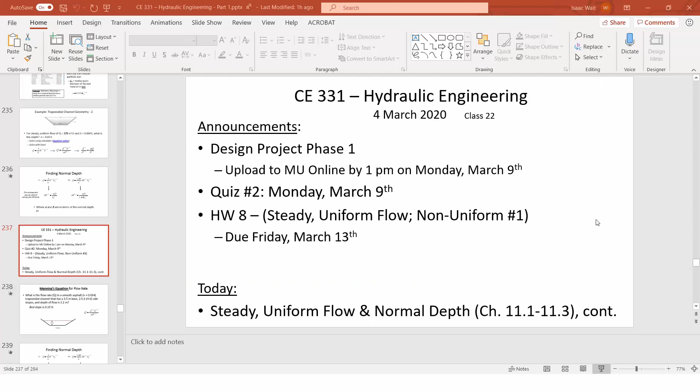Okay, so here on the whiteboard, I've given you kind of a hint of what we're doing for the area. The area has two components. It has the rectangular component of the channel, so the 1.2 meters by 3.5 meters is this rectangular section. And then, since we know it's 2.5 to 1 on the side slopes, that means that if it's 1.2 meters of height, then this distance over on the side is going to be 3 meters, because it's 2.5 times 1.2. So if the depth is 1.2, then this width of the triangle will be 3 meters.

And so if you put these two triangles together, then it's essentially a rectangle that's 1.2 meters by 3. And so there's the middle part and then the two sides together for the area. And then the wetted perimeter is going to be the bottom width of 3.5 meters and then 2 times the side length. And the side length here, the hypotenuse of that triangle, is going to be the square root of 1.2 squared plus 3 squared.

So if we find the square root of that, what we should get for the area is 7.8 meters. And for the wetted perimeter, the distance should be 9.9622 meters. Okay, so once you have those geometric parameters, then you can substitute it into Manning's equation to find what flow rate should we expect for this depth, slope, roughness value, and geometry.

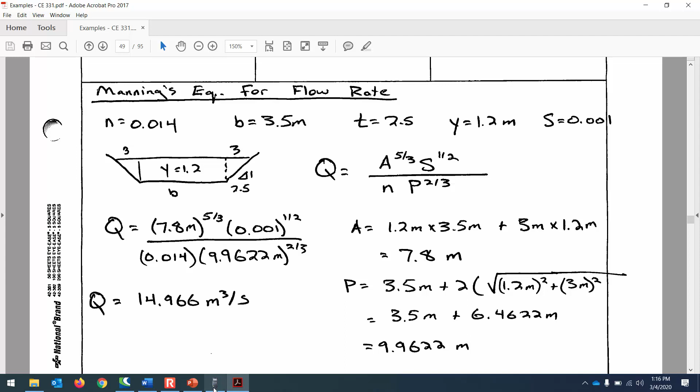So normally as a hydraulic designer, really what you have control over is the material, so that affects the n value, and then you also have control over the geometric shape and the width of the channel. Flow rate is something that's usually given or a result of things like storm conditions. So any questions on this example that we're using to calculate the flow rate from an observed depth?

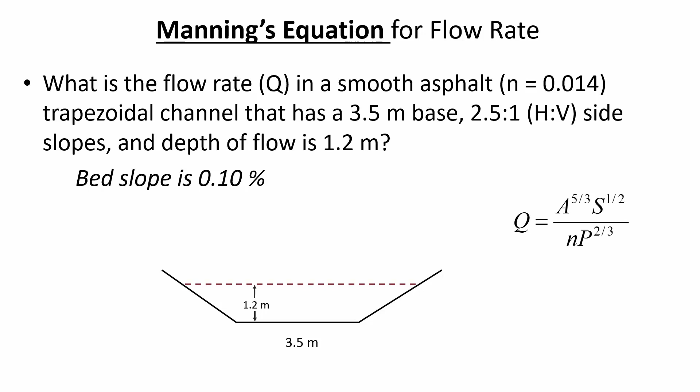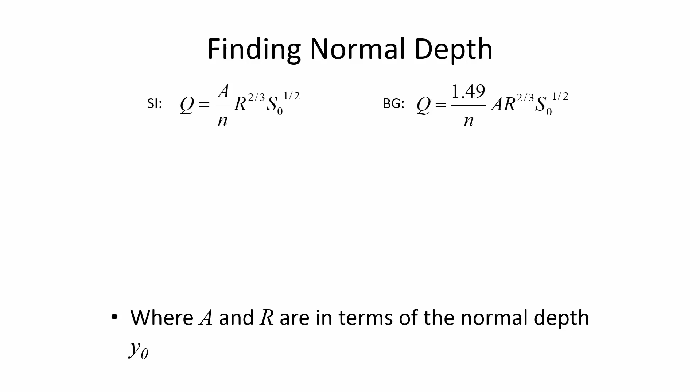Okay. So the trickier thing by far is to calculate what depth will you have for a certain flow rate. What we've just done is relatively direct and straightforward, but the tricky thing is rearranging this. If we're going to solve it with the solver, then you don't have to rearrange the equation algebraically. You just type everything in terms of y.

But if we're using Excel, like was demonstrated in class previously, the technique there was to move all of the constants to the right-hand side of the equation and then start with a guess value of the depth and see what depth it takes until the left-hand side and the right-hand side are equal and there's no difference between the two.

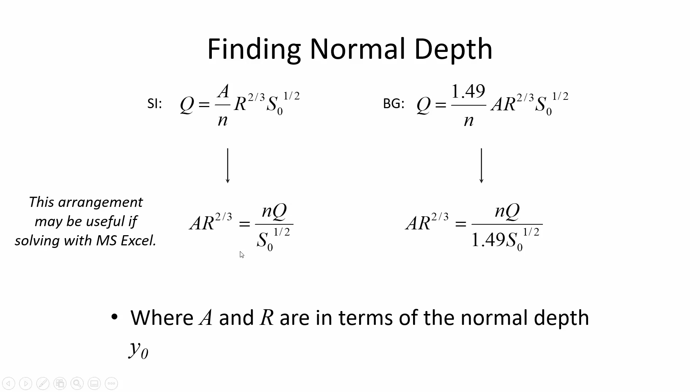But I told you that it's unavoidable that you have to learn how to do it on the solver of your calculator. I'm going to show you with this next example what it would look like if you solved it on the calculator that I wish you owned.

I wish you owned the HP 50G, and in fact I was considering making it a requirement for the freshmen who enter Marshall next year, but what I just learned the other day is this calculator's been discontinued. Yeah, so that'd be a fun requirement. Yeah, they'd have to buy it from, I don't know, like an overstock place.

I mean, HP still does make a calculator that's awfully good, but I don't have one, and I don't know. The new HP calculator is called the HP Prime, and I think it's targeted more towards the education market, where the HP 50G was directed at engineers specifically. It was less about the education market and more about engineers.

So, all right, let's take this trapezoidal channel, and we're going to put 29 cubic meters per second through it. We know the bottom width is 3.5 meters. The side slopes are 2.5 to 1. So this is a bed slope of 0.001. This is the same layout as the example that we just worked.

In the example we just worked, though, what we had was a depth of 1.2 because we had a flow rate of, what was it, about 15 cubic meters per second in that example. So what if we take the same channel and instead of a flow of 15 cubic meters per second, what if we put 29 through there? The question is, what is the depth?

So let's solve the same problem where we've got 29 cubic meters per second going through this channel. Here's the equation you need to put into your Casio, and you're going to be solving for the depth Y. All right, so here is the equation translated into Casio speak, and what we're going to be solving for is the depth. Same channel geometry. Let me write the factors on the whiteboard since they won't be on the screen with this up.

So we've got N is equal to 0.014. The slope is 0.001. The Q value that we're sending through that channel is 29 cubic meters per second. The T, the side slope, is 2.5 units of horizontal per vertical. And the bottom width, B, is 3.5 meters. And we want to find out what is the flow depth under steady uniform flow. So what's the normal depth using Manning's equation?

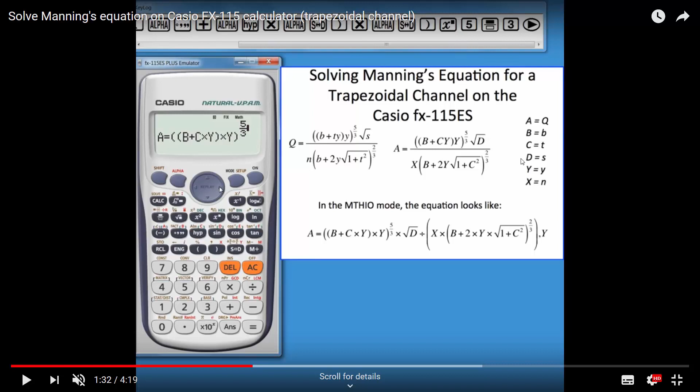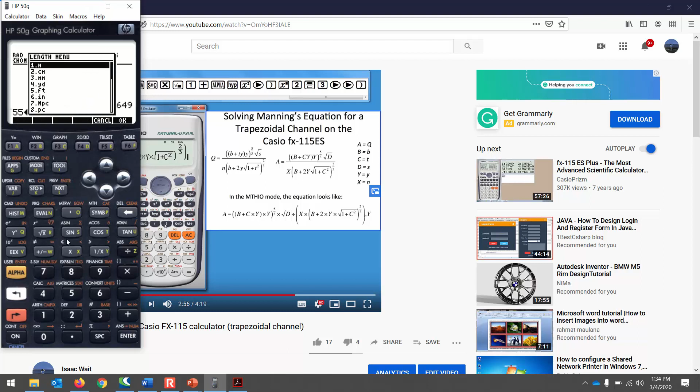The other thing that's pretty cool about, well, there's many thousands of things that are cool about this HP calculator, but one of the many things that's cool about it is it does units conversion. For instance, if you have 55 meters and you want to know how many inches that is, you can go into length and convert the units. I don't want to demonstrate all of that, but it does units conversion,

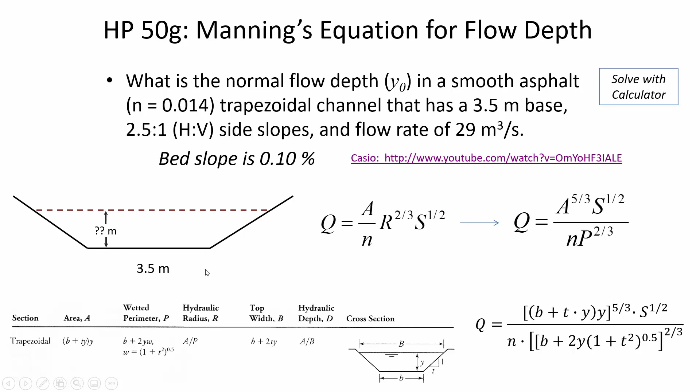and it's great. Okay, so that's the second thing we've done today, looking at how to calculate the depth for a known channel and a certain amount of flow rate. One of the reasons why we're interested in velocity through streams is that there is a certain amount of energy that's being exerted by the water on the material of the channel.

And so you can see in this channel that there's been a lot of scour and erosion where the water is flowing. It's taking soil and can chip away at broken, fractured rock. Even if it's an erodible rock, the scour of the stream over time can wear away and is more smooth than if it's lifting blocks up out of the water.

But we can think in terms of the shear stress that's being applied by the water to the material. And remember, the relationship between the shear stress that's applied and the slope of the channel is dependent on the hydraulic radius and the unit weight of the fluid. Now, in Manning's equation, we can find the maximum allowable velocity by relating the slope of the channel and the shear stress.

And so the way that we would fit these two together is that oftentimes through soil analysis you can find out what's the maximum tractive force of a soil. And that you can think of as related to the cohesive strength of the soil, or what shear stress is going to cause the grains to let go of each other and start to move independently.

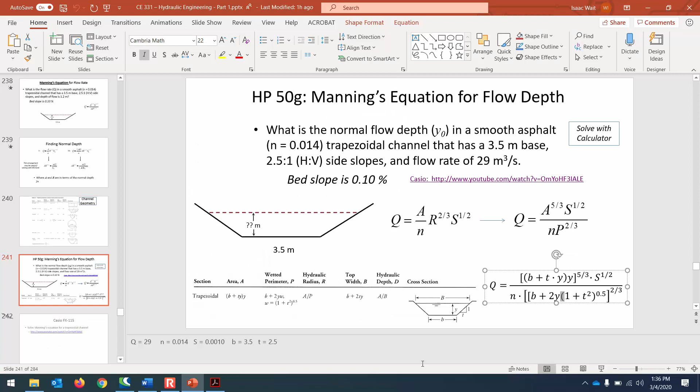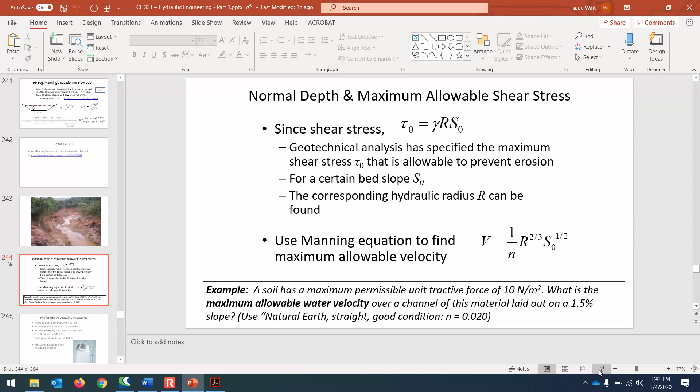I think Maggie's going. Okay, so first we need to find an equivalent hydraulic radius. Now there's no physical significance. The hydraulic radius here isn't referring to any actual geometry. If you look at the problem statement, it never says what's the width of the channel. It's not talking about what are the side slopes or whether it's rectangular.

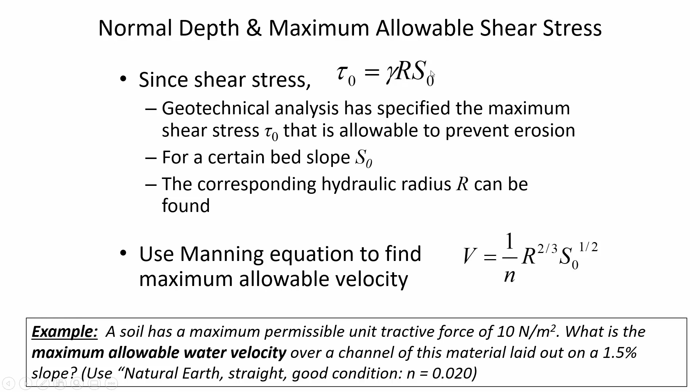So this R that we're finding here does have units of meters, but it's really just a meaningless placeholder that's the ratio of the shear stress to the slope, taking into account the unit weight of the fluid. So when we do that calculation, we get that the equivalent hydraulic radius is 0.068 meters, and then we can substitute that value into Manning's equation and solve for the velocity of 1.02 meters per second.

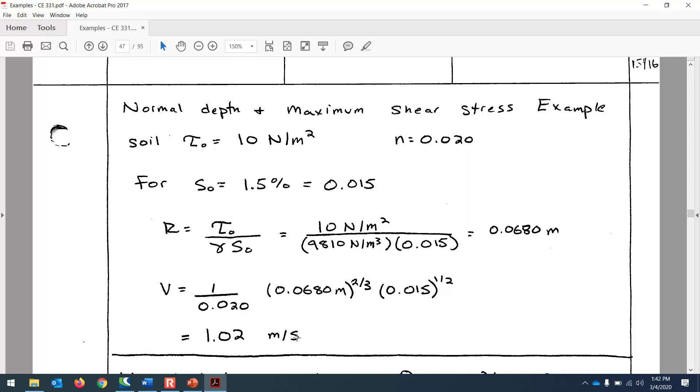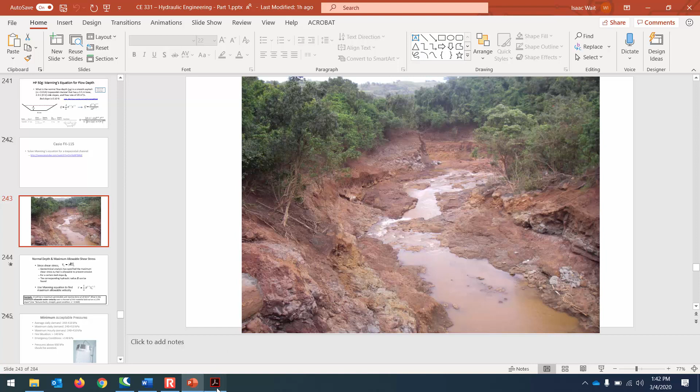So any faster than that, and it's going to be applying too much shear stress to the soil, where the shear stress applied is greater than its cohesive strength, and the grains begin to separate and scour occurs, and over time the channel will become damaged, like is shown here. Any questions on this example? Okay, we have a little bit of time, so I'm going to bring up a picture of the network.

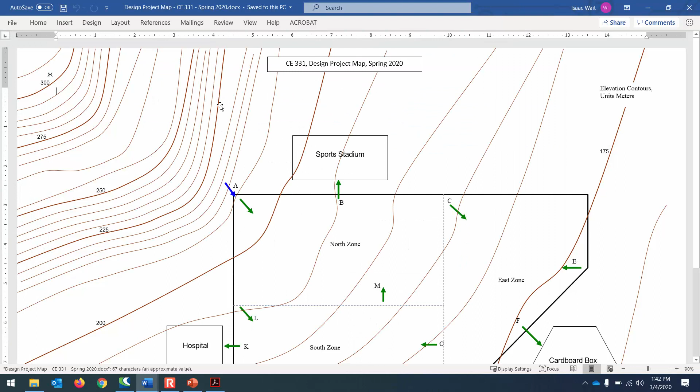All right, so here is the map for the design project. Are there any questions related to the demand estimation stuff that you've been doing so far, things that have been uncertain or unclear? If you ask it now, then maybe everybody would benefit from the insight and the discussion. Well, let me ask you a thought question. Oh, go ahead. Elizabeth has a question.

You have the East Food Plant, MG per week. What does MG stand for? MG means millions of gallons. All right, so she asked about the food processing plant in the East Zone. It's internal, so it's not an external like the cardboard box factory. But however much water they need for that food processing factory is going to be equally distributed between Junction C and Junction E.

So how many million gallons per week is yours, Elizabeth? Mine is 2.5. 2.5 million gallons per week. Now the summary form, what units do I ask you to use for the flow rates on the summary form?

Liters per second. So you're going to have a units conversion there, but you also have to think about time. So what you're trying to do is you're trying to figure out your design condition. And the residential uses, remember there's going to be the average daily flow and the peak hour flow, and then there's the peak day flow. And so residential is pretty straightforward. We use that curved figure that shows how the demand patterns change over time.